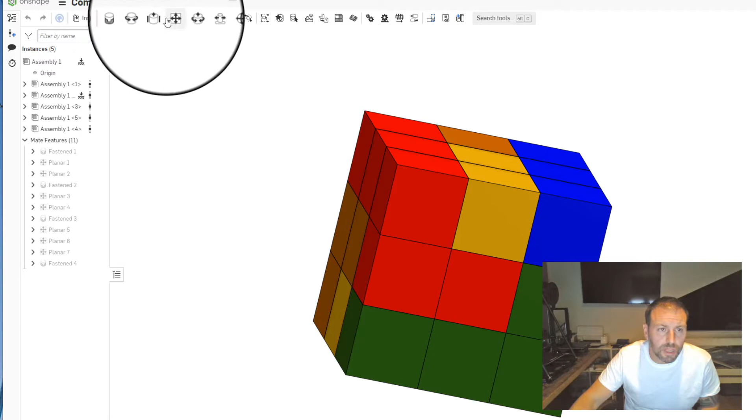Everybody, today we are going to make the puzzle cube from all the parts we had made last week. So let's take a look at a completed puzzle cube so you can see how this all went together. So I have all my individual parts, and what we did is create an assembly from all those different sub-assemblies. We used these different mates up on here. So we used a fastened mate, and I also used a planar mate to create this cube.

And essentially what we're doing is we're trying to remove all the different degrees of freedom from the parts so that they interlock as it would in real life. So we're going to get to it and start with this. What I'll do is I'll start with this green one and then blue one, show you how they mate together, and then we'll slowly start using the different planar mates and fasten mates to get it together. All right, so here we go.

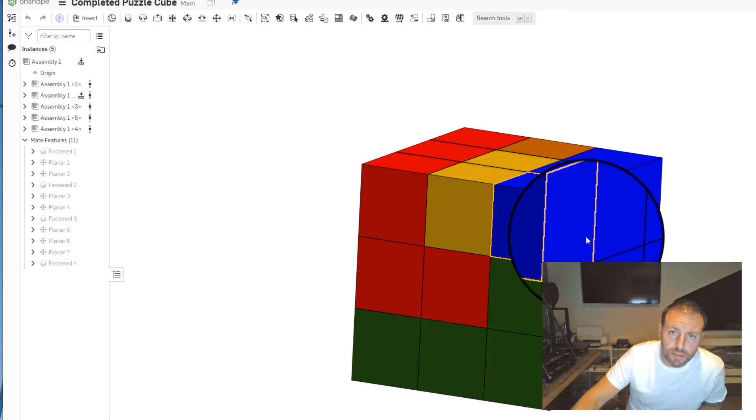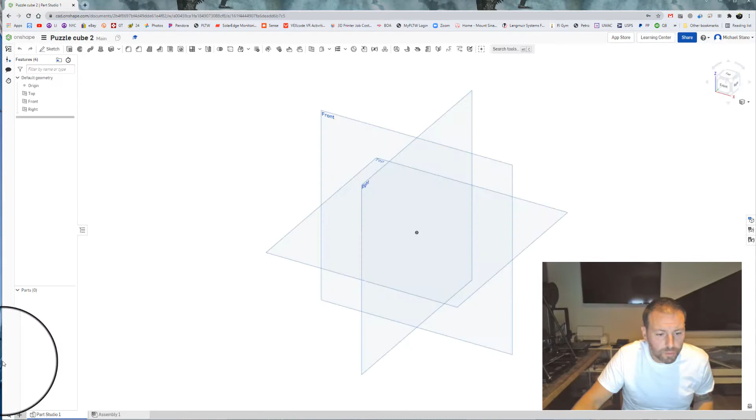So let's close this document. I'm going to create a new assembly. All right, so I'm going to go create, and I'm going to go to document right here. So I'm going to create a brand new document and import in everything. So we'll call this puzzle cube 2. Okay. And that is going to be the start of what we have. And we see on the bottom we have assembly. I'm going to jump right into that.

I'm going to go to insert. I'm going to bring in all my different parts. So we're going to go to other documents, my Onshape, and I have them all in a folder. So let's go to puzzle cube. And I'm going to start bringing these in. And I can go to assembly. So part studios, then assemblies. There's the assembly, and we insert it right in. Now, sometimes when you do this, it may ask you to create a version from that. You go ahead and create the version.

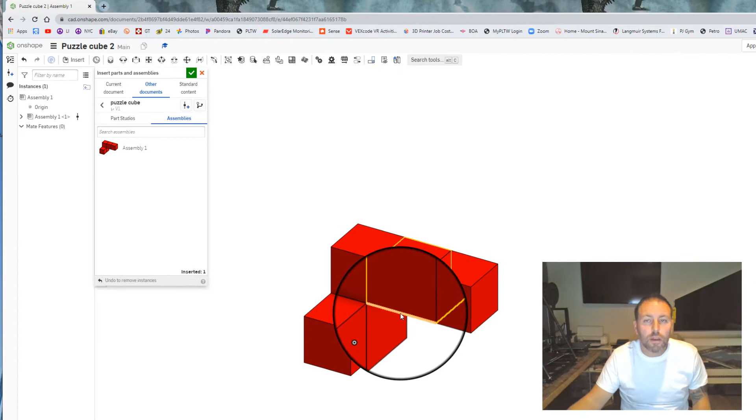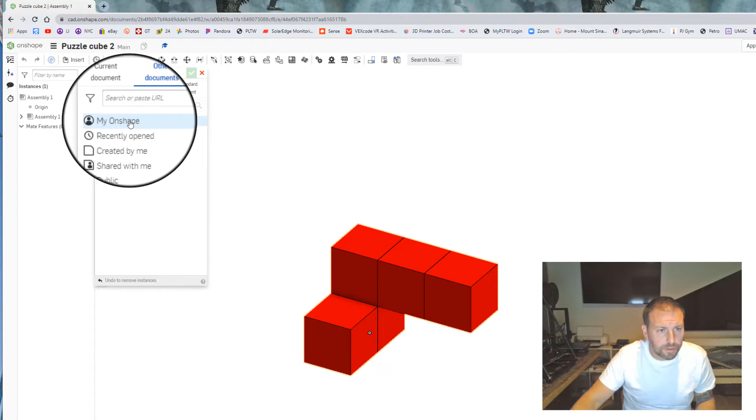So now we go back to other documents, My Onshape. Oops. And let's bring in the pieces, assemblies. Check mark. Okay, and we're just going to place these in. Back button. All right, it doesn't matter the order at which we bring them in. And we got one more here, this orange one. Now, I don't remember how this goes together, so this should be a little interesting. All right, so there's all my parts.

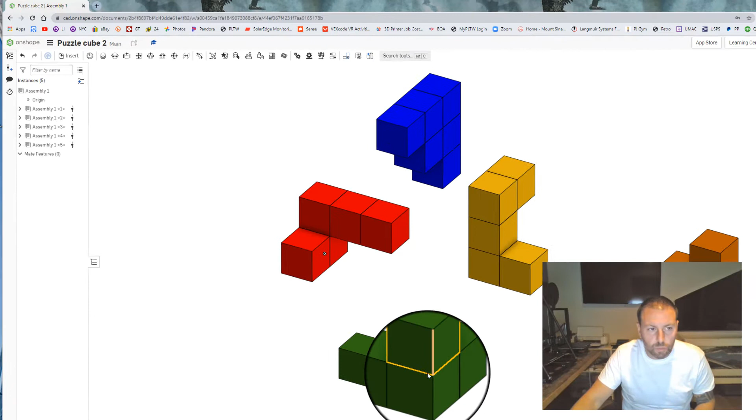Let's hit check. Now, what I'm going to do is I'm going to ground or fix this one in space here. So I'm going to click on it, and that's this assembly here. I'm going to right-click on it, and hit fix. So now you'll see it's got the little symbol right here. So if we go to click on it, notice it doesn't move, and that little red and white thing shows up. Now let's move some of this out of the way.

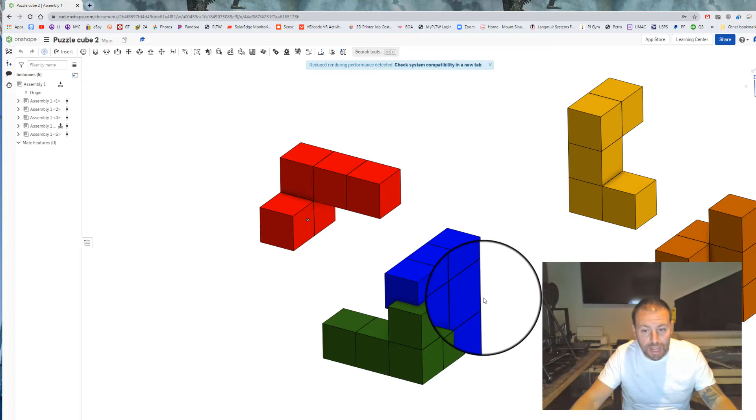And this blue one is the first one I want. So this one's going to come in like this, and notice I can just move it in, but it's not how it's assembled. So I'm going to click. First one I'm going to do is the planar. So planar mate. I'm going to select this side and this side. All right, we'll hit the check mark. So it looks like it's good. And that's it. So now, let's just hit escape.

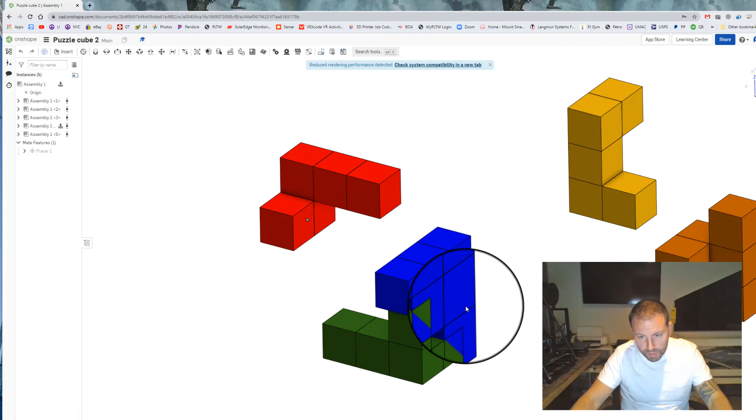Notice when this moves, it moves in that same plane. So we're removing the different degrees of freedom, right? So now we have this one plane like this, so it can't go like that. I'm now going to line up these two planes right here, and that's going to stop it from going that way. So I can do the same thing, planar mate.

Select those two sides, hit my check mark, and now they're in that way. Let's hit escape so we can just look. And now you can see it only can move up and down.

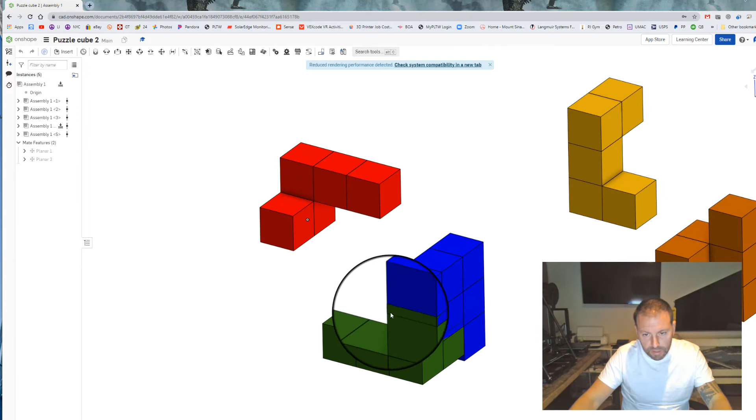And what I'm going to do here is another planar mate right here. I could probably do a fasten at this point, but I'm just going to use the planar mate, and it's fine. Sometimes using a fasten will work, but it'll get a little wonky and throw it out. I feel like this is probably one of the easier ways of doing it. Planar mate, solve, and now that piece is completely locked in.

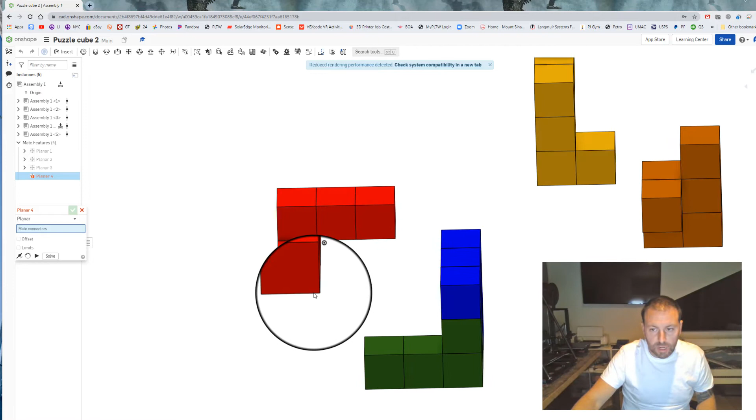And that's it. So now what we need to do is go around and continue with the rest of the parts. All right, so I'm going to hit the check there. So I'm going to take this one. It should come in right around there. So if we look, let's bring it in a little bit closer. So this one is going to go in, something like that.

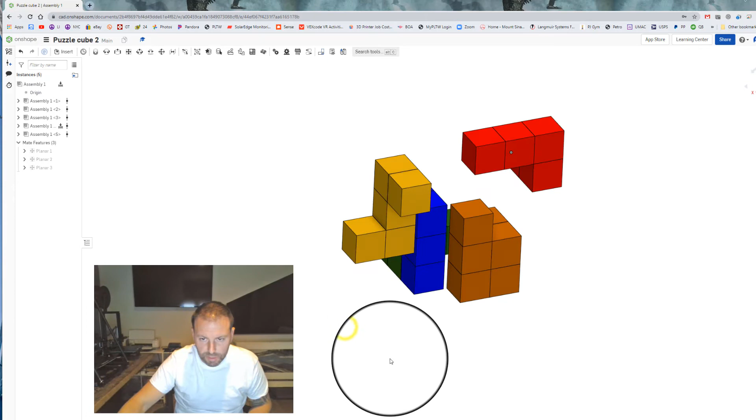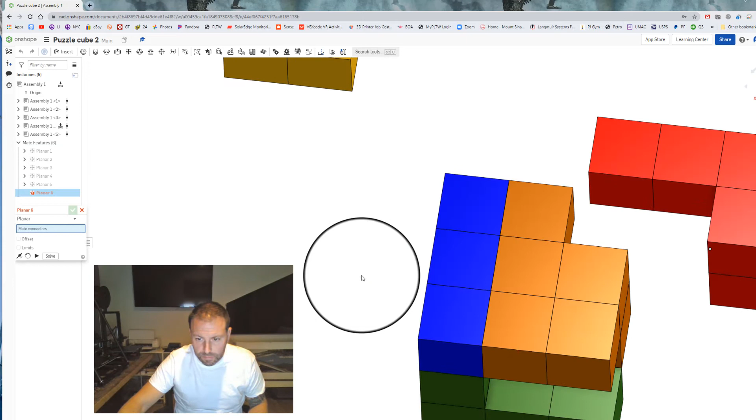All right, so let's start with some planar mates again. Let's do the bottom. You can really assemble this whole thing with the planar mate. Check. All right, let's get the back end here. Check that. And so far, so good. I'm just going to hit the X mark. Let's see which way this moves. So it's going to move in and out.

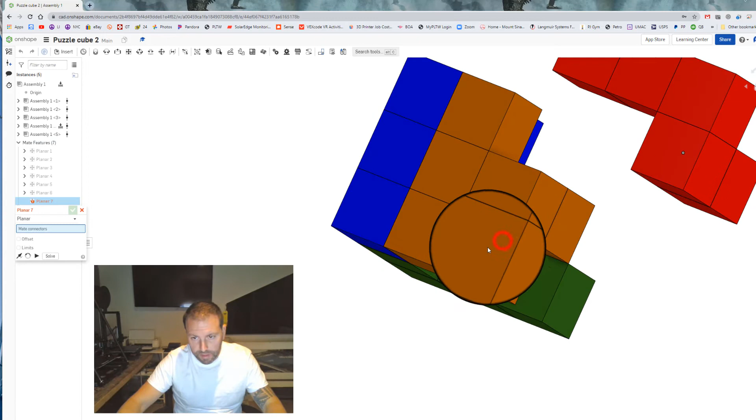So at this point, I can create a planar mate right here. So let's do that. And there we have it. That's completely locked into place. The next one, I believe, is the yellow one. I believe that one comes in over here.

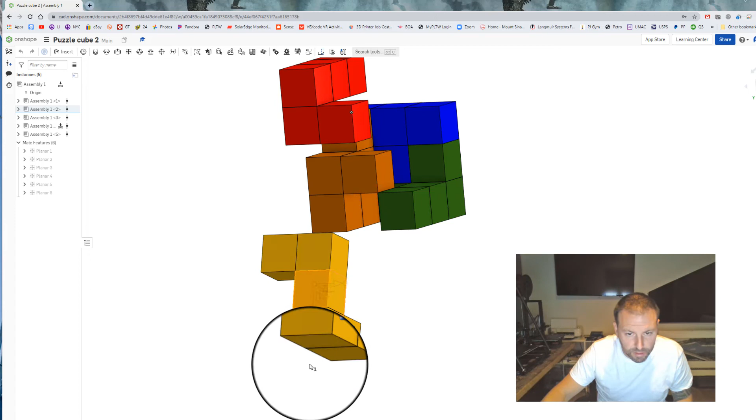So let's do this. All right. And it looks like this piece might need to be rotated. So in order, oops. Right here. So just by clicking on it, I can rotate the piece around. It doesn't go that way. Actually, I need to rotate this way. Just like that. So that's how that block's going to kind of go in.

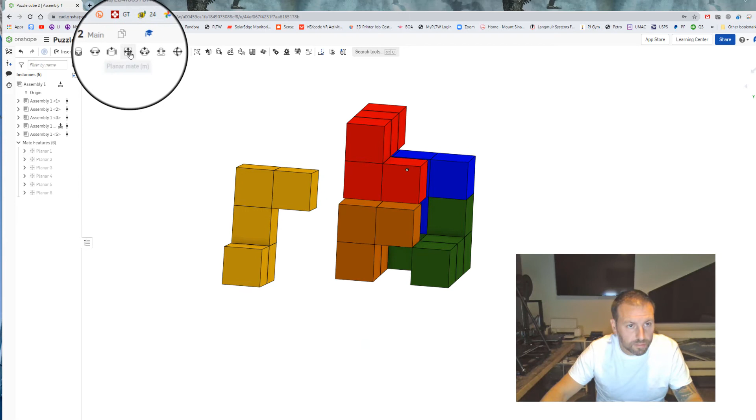Okay. So what we'll do is we're going to do a planar mate. I'm going to do this surface with that one right there. Okay, so I'm going to hit the escape key and pull this over. All right, so that one's going to go inside there. So I'm going to do a mate with the bottom.

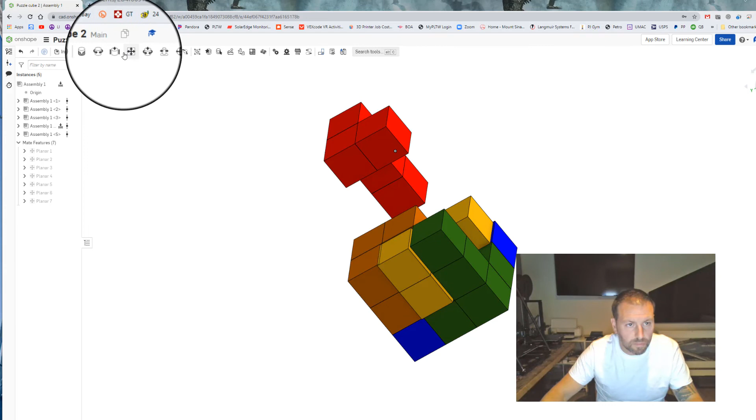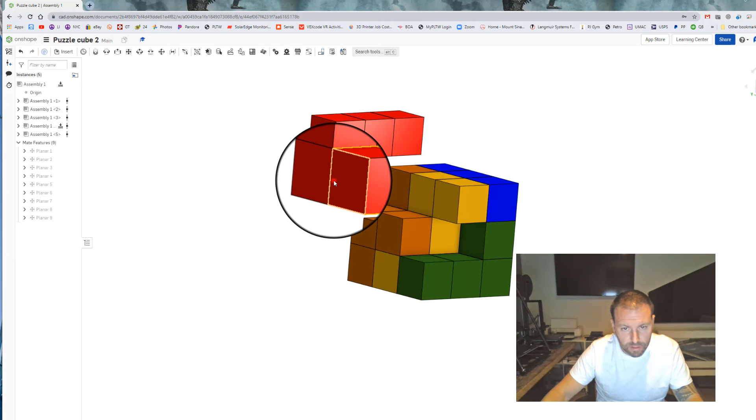And I should be able to move it this way, so let's do a mate right there. So we're removing all the degrees of freedom from this. And now we're just going to click on this, and let's rotate this kind of into view. So we don't even need to do this, but it just makes it easier to assemble. All right, and then that one's going to fit in there. So let's do that. Some more planar mates.

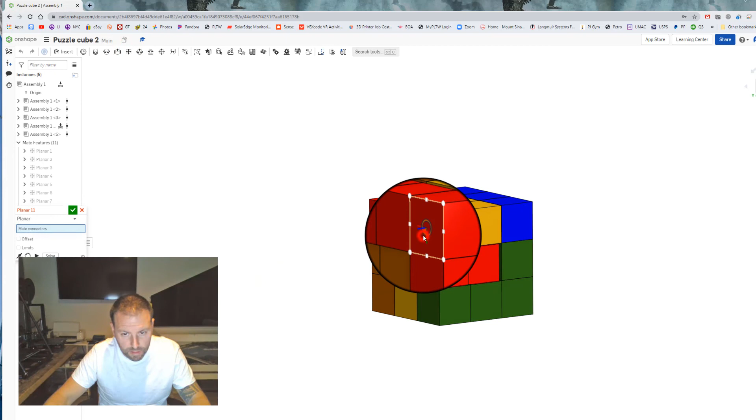And now if the plane doesn't line up, I'll show you with the next one. Right, so let's do this side here. If the plane doesn't line up the way you want, you can hit this X right here. And notice it reorients the plane like this or like that. But I'm going to hit that back. Hit the check mark. And now, let's escape.

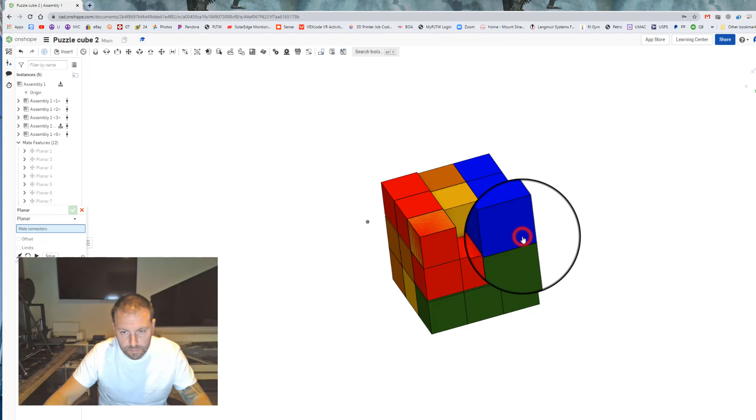Let's just move it up. And now I just need to do the top. Let's do another planar mate. And there is the completed puzzle cube. That's all you had to do. So you can use a series of basically 2 to 3 planar mates per part, and that will allow you to assemble the whole cube and remove all degrees of freedom.

All right, everyone. Hope you enjoyed that video on assembling the puzzle cube using the planar mate, and you could probably use a fasten as well.